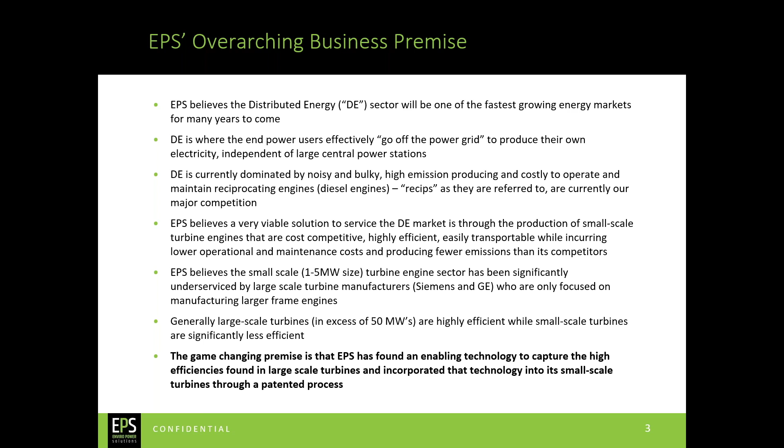First, a summary of what our plans are and where we are today. Our goal is for our turbine engines, the EPS engines, to have the best-in-class efficiency, the lowest O&M costs, lowest emissions, longest operating life, and best system uptime availability. We're going to focus on manufacturing, through assembly only, our turbines in the 1 to 5 megawatt power range. That is considered small scale.

Some would even classify these engines as micro turbines. Initially, we will produce 2 turbine engines. One will be a 1.6 megawatt turbine that will use any form of liquid or gaseous fuel as its fuel sources, and the other will be a 1.2 megawatt biomass turbine that will run on any form of solid waste biomass. The key is that our engines will compete very favorably against the diesel engines that currently dominate this engine size space. EPS turbines will provide primary power for many end user groups using an abundance of fuel sources.

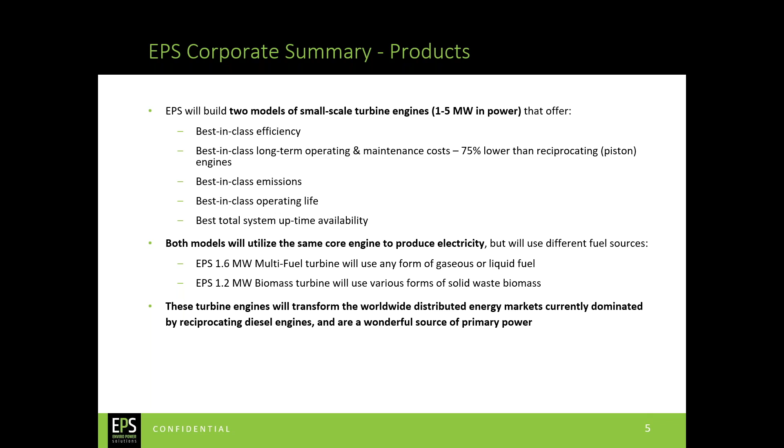We have about 8 years in development under our belt already. We've raised and fully deployed $4.5 million US in cash common share equity received from about 35 shareholders and raised an additional $1.5 million through preferred shares in this initial development stage. The patented enabling technology, the intellectual property, has been arranged through a draft 20-year royalty-free license arrangement with our design and engineering partner, Brayton Energy, but more on them later.

We have built and successfully tested a quarter-scale model of the biomass combustion chamber. We have 2 customers that have signed letters of intent to purchase significant quantities of our turbines. We anticipate that we'll be ready for full-scale commercial production in approximately 2.5 years after the alpha and beta stage testing is complete. What EPS is looking for right now is up to $18 million in US dollars from one or multiple investors to be received over the next 10 quarters to complete the development stage and move forward towards full-scale commercialization, but more on that later as well.

Although I will go into some financial highlight detail later on in the presentation, our first production engine is scheduled to be built in Q2 of 2023. We anticipate receiving progress payments or cash advance payments on those first commercial orders, and the first such payment is expected to be received in Q1 2023. Our indications for initial sale prices for engines are about $1.44 million for our 1.6 megawatt multi-fuel turbine, and the sale price for the 1.2 megawatt biomass turbine is about $1.8 million.

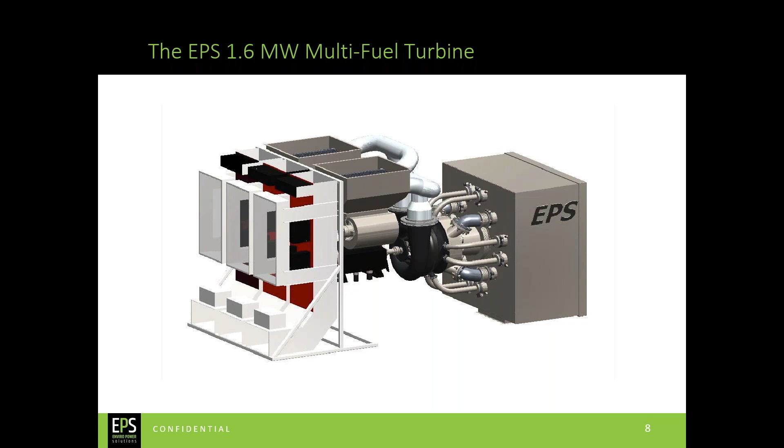So the key takeaway for the engine is that it is a somewhat different architecture, and it incorporates what we refer to as a recuperated intercooled gas turbine engine. The benefits of the intercooler and the recuperator propel its efficiency to a substantially higher level than current gas turbine engines, which I'll talk about later. But roughly, we're targeting efficiencies over 40%, and the competitive gas turbine engines are in the low 20s, so almost twice the efficiency of the conventional gas turbine engines.

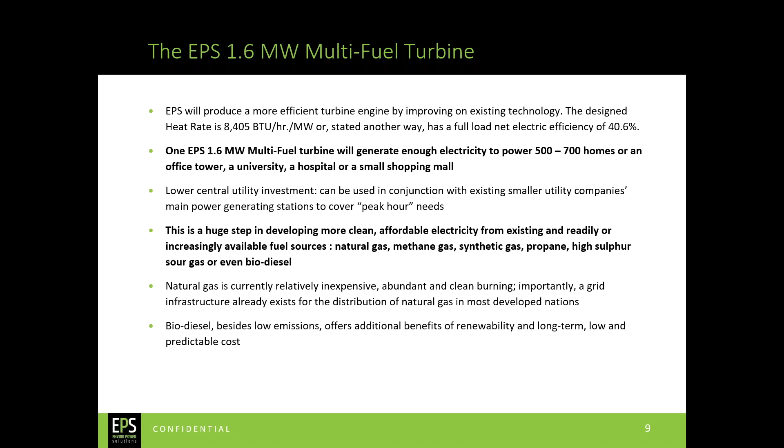And with that, we've adapted some modern technology for the emission control system, an integral emission control system without any after-treatment requirements. So it's a very clean burning system. And as will be stated a few times, it's designed to use a number of emerging fuel types coming along. Next slide, please.

Mike, why don't you put your mute on? There's a lot of side notes or background noise. So that's better.

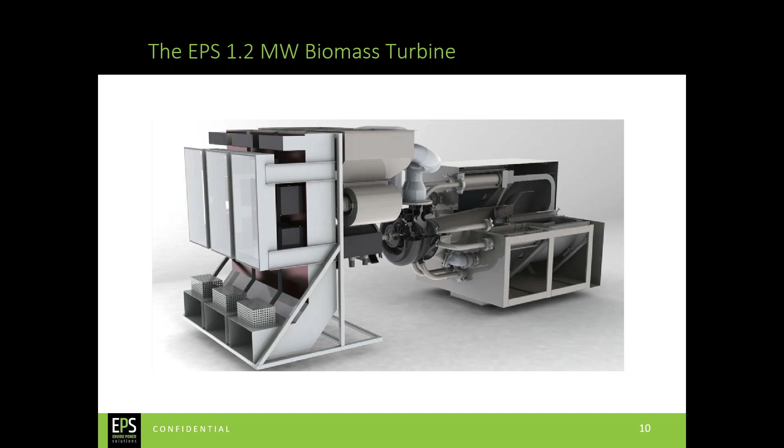So I think I'm going to summarize a few things here. So again, our work has been on testing, and I'll show some test rig that we use to develop the combustor for directly burning solid fuels in the gas turbine environments.

We preserve the characteristics of the gas turbine, its multi-fuel capability, its very long life potential, and its very low emissions. And we're adapting it to burn solid fuels from agricultural waste or cellulosic material, emerging work on algae and other bio-derived fuels, and of course wood chips and pellets. So that's the key novel aspect of the engine.

Again, there's a conventional version of the engine for natural gas and other conventional liquid fuels, and then there's the solid fuel burning version of it, which I just showed in the previous picture. Next slide, please.

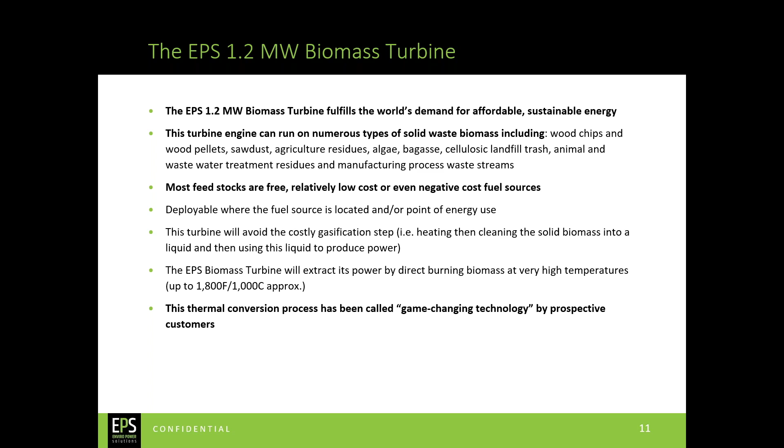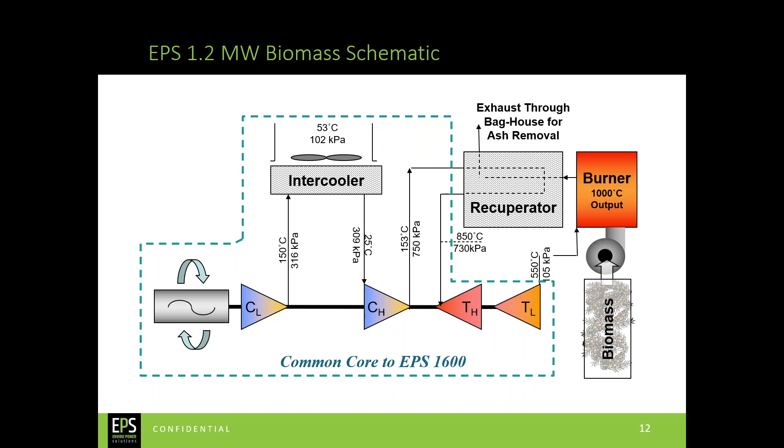And basically, a novel feature is that it burns the solid fuel at atmospheric pressure. So there's no need to deliver the fuel supply over the pressurized boundary. Rather, it's essentially inhaled into the engine at the exhaust where the static pressure is quite low, and we use a blowing or conveyor system to blow the sawdust in there and burn it. The recuperator delivers the heat across the pressure boundary to the turbine. Next slide, please.

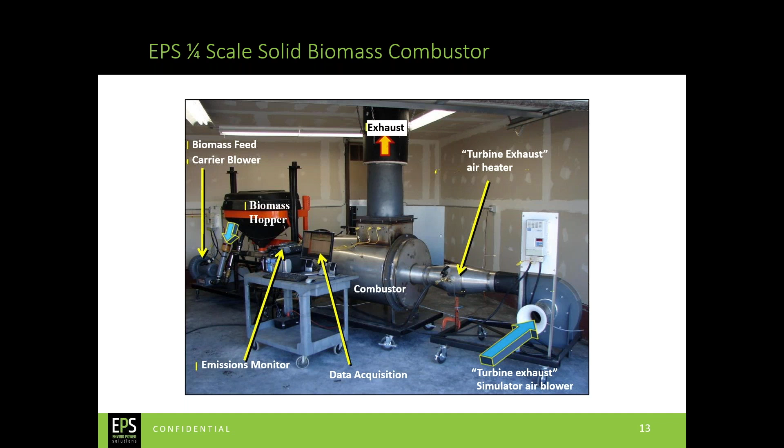So on the left-hand side we basically used a common spreader system, sort of a salt spreader from a municipal activity. Basically just something to dump the solid fuel into the duct, which was then conveyed or blown into the turbine exhaust simulation. Next slide, please.

So again, another rendering of the picture, a list of some of the fuels that we've tested, and we are definitely concentrating on renewable fuels. This really separates us from the competitor engines. They're not only very inefficient, they have no way of burning some of these unusual fuels.

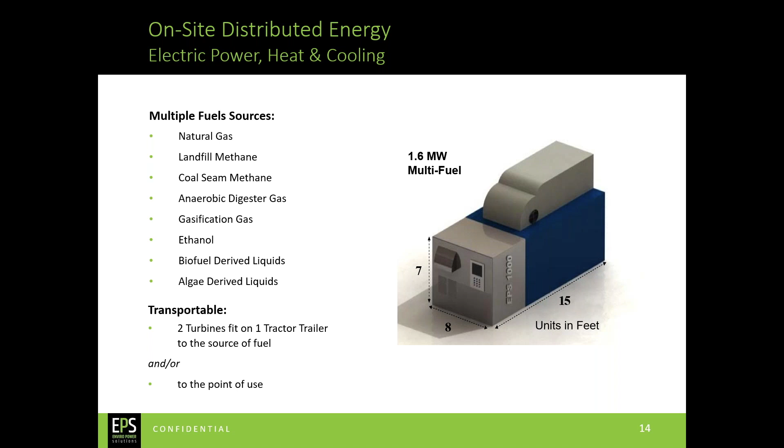And the piston world of engines, which I'll talk about later, also has no really practical way to burn many of these. The diesel engines or natural gas engines are very well developed and very competitive, but they cannot use this range of renewable energy fuels as we can with this purpose-built EPS engine. Next slide, please.

So in summarizing, it's very high efficiency, roughly twice the efficiency of our competitor gas turbine engines. There is the potential for using the waste heat from the turbine machinery to provide additional energy recovery for so-called cogeneration, domestic water heating, drying, municipal drying applications or such things.

And this is a more common area for distributed generation. This is cogeneration for universities and larger hotels and hospitals. But principally the attribute is in burning renewable fuels and doing that very efficiently.

Item 2 is the low maintenance cost. The engine really has only one moving part. It has the rotating assembly that carries the 2 compressors and the turbine, and the alternator is on that same assembly. And that results in a very simple long life system. It's very conservatively designed, modern aerodynamics, but also very conventional in its bearing system. And that shaft speed alternator enables variable speed and some other great features which improve efficiency and reliability.

And then the last point is the exhaust emissions. There's, of course, a lot of pressure in the EPA and around the world, and particularly in the most stringent areas of California, to control nitrogen oxides, so-called NOx, and CO and unburned hydrocarbons. And while spark ignition gas engines and diesel engines require catalytic after treatment systems, this engine does not require any after treatment.

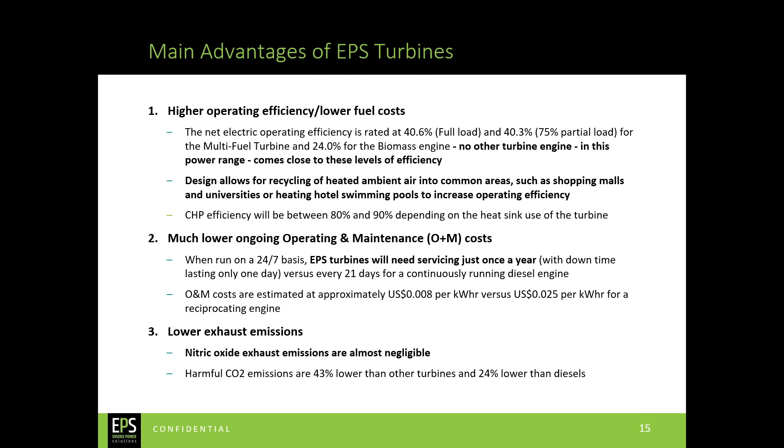It's just a very clean burning system, an attribute of many gas turbine engines, but we've gone the extra distance to make this an extremely low emission engine using modern combustion techniques. Okay, next slide, please.

Okay, so I think in summary also, I should say that every component in the system is designed for a 60,000 hour life. And that is not that unusual for gas turbine engines. They're commonly designed for very long extended operation. This engine operates at relatively moderate temperatures and speeds and stress levels. It's very conservatively designed for the application, and again uses conventional bearings and systems that have been well proven in the field.

The goal for the low O&M cost is to have only service intervals every year, 8,700 hour service intervals, where things like filters and other checks, lubricants and other sensors are checked out. But again, we're not anticipating any significant maintenance over the 60,000 hour life period.

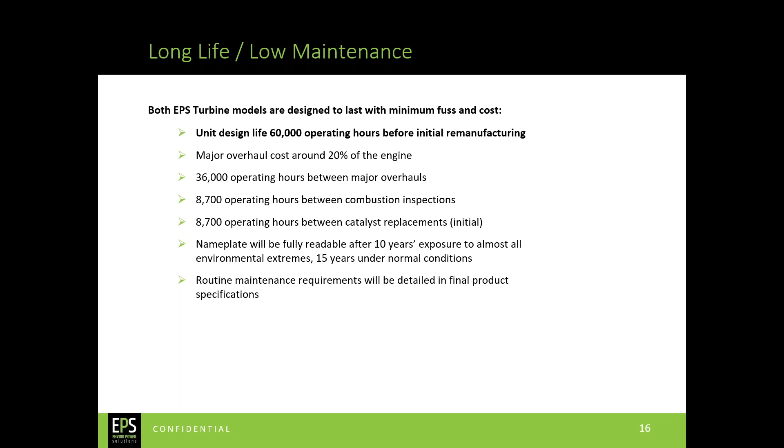Okay, thanks, Jim. So in summary, there's been considerable interest when evaluating the benefits of the EPS turbine versus another small scale turbine produced by a competitor or a reciprocating engine. To summarize, and Jim has gone over some of these points, EPS turbines are available in either a liquid or gaseous fuel version or the solid waste biomass version. There's a strong commonality of parts. In this engine size, there's no other biomass turbine that exists.

Our engines produce very low emissions that will meet or exceed the North American and EU emission standards. They're also scalable up to 5 megawatts. What we've been talking about here and what Jim has showed you is our initial units, the 1.6 megawatt multi-fuel unit and the 1.2 megawatt biomass unit, but they are scalable up to 5 megawatts. We've had a lot of interest in the 3 megawatt version size. They can be put in series to form a power substation.

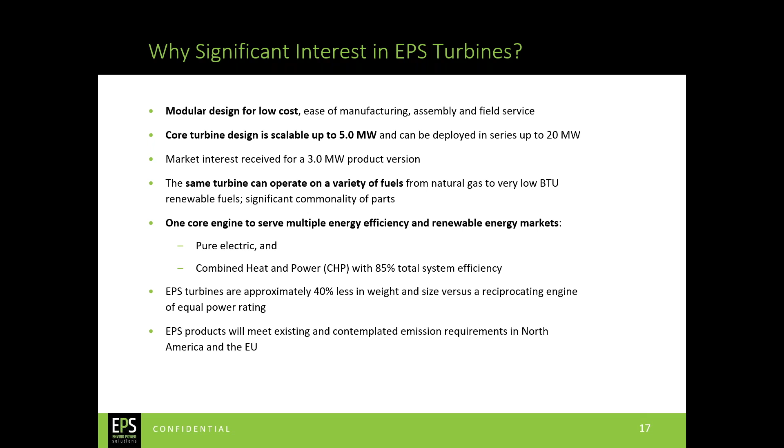And the key here, they're lightweight and they carry a very small footprint. We can deliver them to a customer location on the back of a flatbed truck or standard 20-foot shipping container. One of the areas that the EPS board is strongly committed to is to ensure that EPS turbines have a worldwide reach. Even in developing nations or in underdeveloped nations, we believe that everyone should have a right to clean, reliable power at affordable prices.

EPS has had discussions with the government of Senegal and believe that it would be wonderful if EPS can participate in powering Africa to provide enough energy for villages to have clean drinking water through water purification facilities, enough power to run a school, power to run a hospital or a clinic, and to provide the internet to villages so they can stay in touch with the world around them. And I'd like to outline some of the benefits now of a potential investment in EPS.

Three key things here, but green energy investments are increasingly seen as attractive in private and institutional portfolios. In a few years' time, we believe that EPS will be ripe for a takeover bid or as an early IPO candidate. We have three strong reasons for you to consider an investment in EPS at this time. Firstly, we have very powerful economics due to our LOIs that have already been issued to us. We prepared a 7-year detailed financial projection. The forecast was based on input from our letters of intent from potential customers, and early market indications show very attractive sales growth, leading to attractive gross margins and high ROIs.

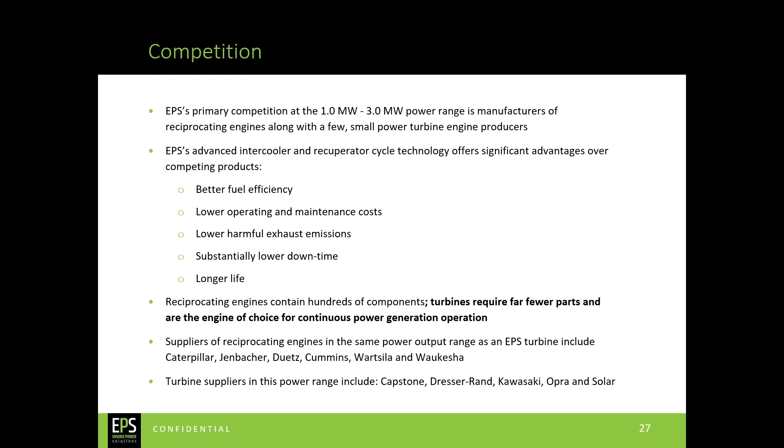The other grouping, the piston engines, of which there are many, as I mentioned, are sort of in two categories: the lean burn. These are natural gas engines, so we excluded the diesel engines, but they're also very efficient, but they have considerably more reliability challenges, limitations in the fuel they can burn, and they do require catalysts and such things. So they're not really in our competitive space so much because they cannot burn the fuels and meet the emission standards that we want for this small power category.

Gas turbines do fairly well on carbon monoxide, CO, but they have relatively high emissions, and they require very expensive after treatment to get into the California and the European markets, while the EPS engine requires no after treatment and can already meet the CARB standards, the California Air Resources Board standards, without any after treatment.

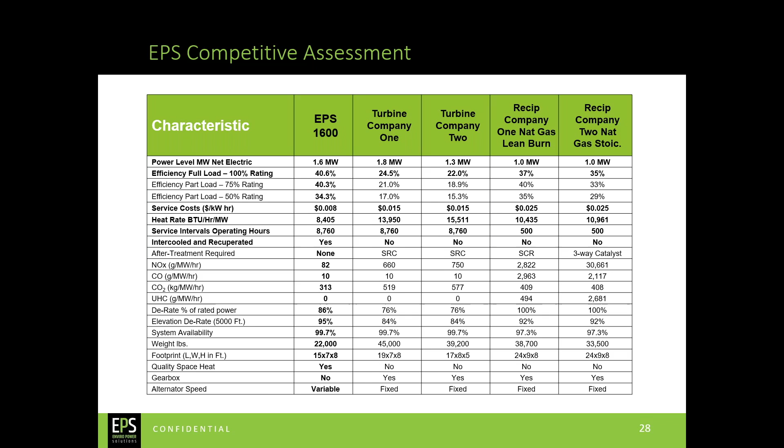So I'll just speak for a moment about our team here. Again, we are a supporting player with the EPS engine and an investor in the program as well. We have roughly a staff of about 50 people, and the majority of our team are engineers. Our core competency is in turbomachinery design, and we have special patent protection over the recuperator and some other things which we're licensing to EPS for their program.

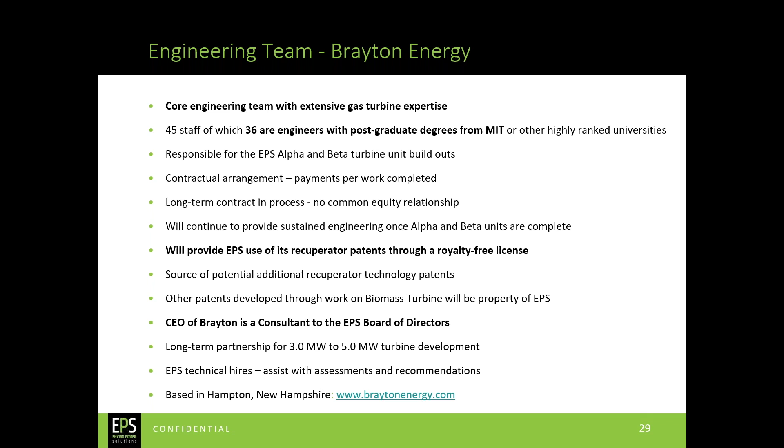We are a research and development and prototyping company, so we do a lot of in-house manufacturing and prototyping, but we're not the production supplier for this group here. But we have significant experience working with other customers and helping them get into production, and that's our intention with EPS: we're developing the early units and then helping them set up manufacturing production, and we've already laid out the facilities and factory for that, and work very intensively with third-party manufacturers to roll up the overall cost. I think that covers it.

Next slide, please. That's yours, Mike. Yep, thanks, Jim.

We've received, as I mentioned, 2 letters of intent. One is from PowerSecure. PowerSecure is a Southern Company subsidiary, and Southern Company is a leading provider of innovative energy solutions to electric utilities and their industrial and commercial partners. PowerSecure provides energy solutions in the distributed power generation sector. The company is a pioneer in developing distributed power systems and the integration of distributed energy resources.

They're focused mostly in Florida and Georgia right now, and their headquarters is out of Wake Forest. I've met several times with the key senior officials of PowerSecure, including their CEO. They have signed a letter of intent to buy significant quantities of both the multi-fuel and the biomass versions of the EPS turbine. They're going to focus on the multi-fuel turbine to start, and they want to use approximately 70% of our units to purchase as peaker units that will be used for peak hour additional requirements to replace their aging recip engines.